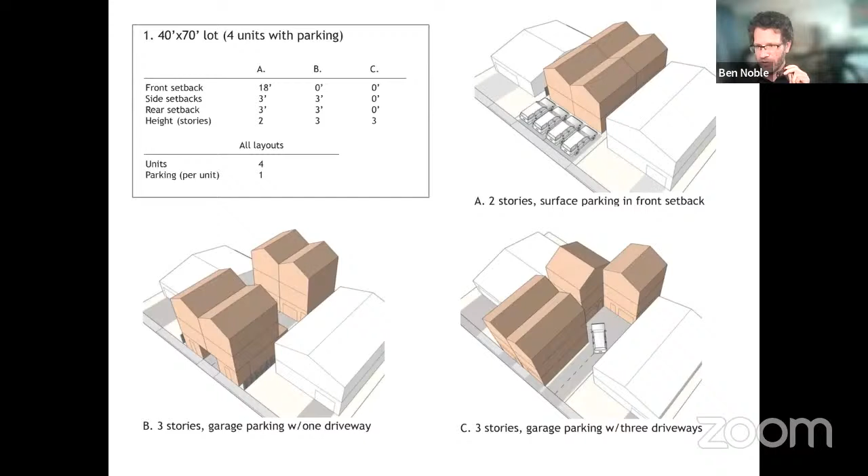Okay, we started by looking at the smallest lots first, the 2,800 square foot lots. As Ben said, our starting criteria was 2-story buildings, 800 square feet, and preferably a decent setback in the front—15 feet was what we assumed would be good to start with.

In the upper right here, you can see a pretty constrained and fully covered site with 4 units at 800 square feet. Basically what it shows is that on the smaller lots, it's really hard to get to the interior of the property, because it's so small. You'll see we have surface parking shown in the front setback area, mainly because it's the only place we could fit it on the property at 2 stories.

You've got, as you can see, double aspect or 2-sided units that really only have windows on 2 sides, and the setbacks are really minimal. So it's very constrained. As we looked at many of the smaller sites and options for them, it became obvious that sticking with 2 stories was going to be really challenging.

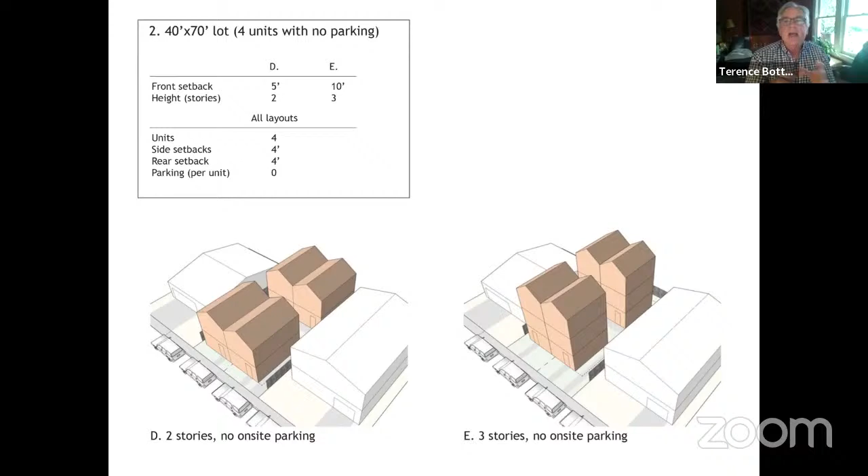Next slide. As Ben said, we also looked at some options without on-site parking, just to check the effect. On the left, 2-story; on the right, 3-story structures. You can see there's quite a lot of improvement in terms of the aspects of the building as well as the on-site open space. One of the things these images show is the difference in going from 2 to 3 stories—you can easily see the increase in on-site open space, or garden space, landscape space, as the footprint shrinks when you go to 3 stories.

I'm going to go kind of quickly because, as you can imagine, there's quite a bit of detail and assumptions in each of these sketches. But first, it seemed like a good idea to do a quick overview.

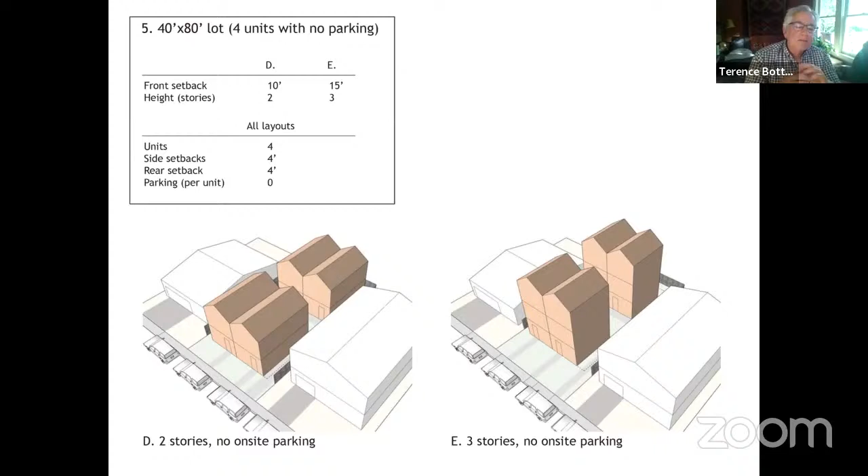Next slide. Again, looking at no on-site parking options, quite a bit of open space is freed up on the larger lot, particularly with the smaller footprints for 3-story buildings.

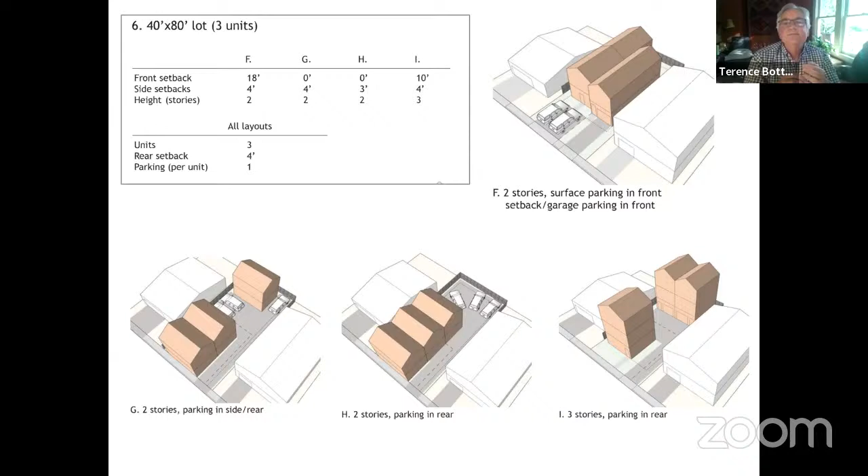And that is my overview. If you have questions, we're more than willing to dig in at some point.

Yeah, so I'll take it over from here, unless there are questions. I have a question. Susan? Yes, this is just to clarify.

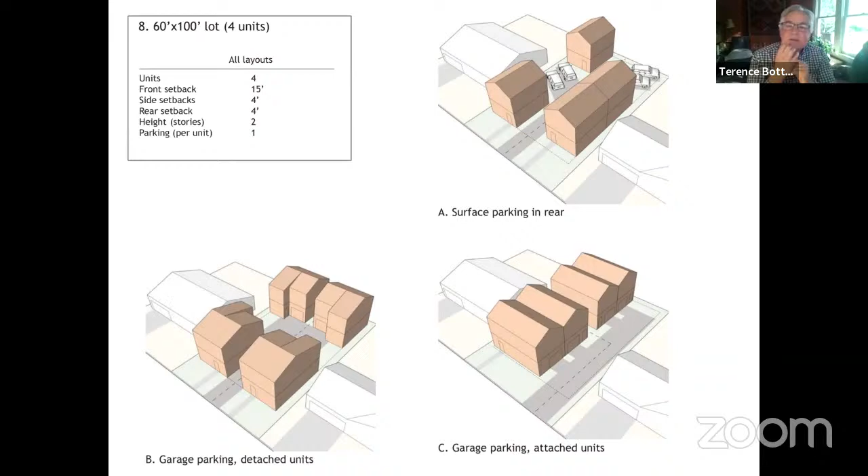So when we talk about a 2-story building, you used 22 feet in height. If we're talking about a 3-story building, what are we talking about as far as the height of those buildings? Sure, we assumed, just for the sake of doing the drawings, that the building heights would be 30 feet to the eave line, and then another 5 feet to accommodate a pitched roof.

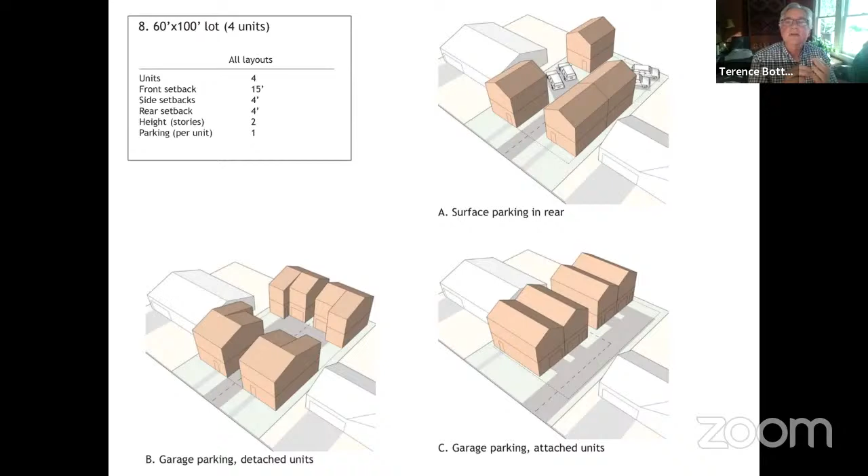As Ben and Katie and I have been talking about the height issue over the last week or so, there's flexibility in there because a lot of the height discussion depends on assumptions about the interior ceiling height in the units. So we didn't necessarily get too picky about that at this point. That's a more granular discussion that we know the Planning Commission is interested in. But for the modeling, we kept it simple and just assumed 22 feet to the eave line for 2 stories and 30 feet to the eave line for 3 stories. Okay, thank you.

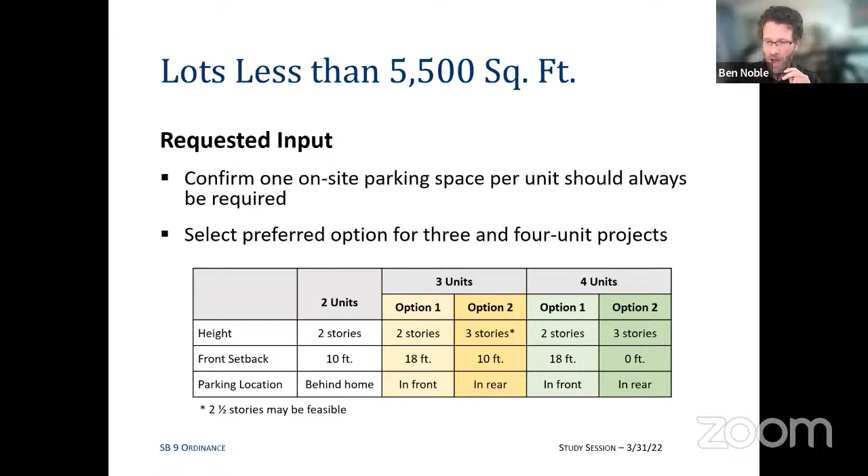Ben, if I could interrupt you for one second — sure. On that picture of that unit in Santa Cruz, they went through design criteria, and Arc and Site had to be approved by the city. And we don't have that option with SB9, right? That's correct, they have to be objective standards. So whatever somebody submits, we have to approve.

So we'll never get anything that looks like that — right, there would be no discretionary design review process, but the city does have the ability to establish objective design standards that could apply to a project like this.

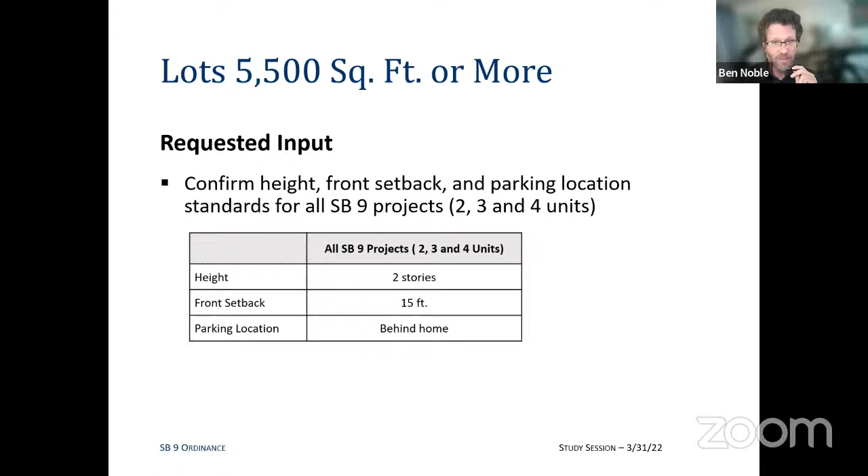Okay, and then, as we were saying before, for lots 5,500 square feet or more, we think the city can get most of what it wants even on a 4-unit project, limiting it to 2 stories, a front setback of 15 feet, and parking located behind the street-facing building.

And so in terms of building height, our recommendation is if it's a 1-story building, 16 feet, similar to what the ADU ordinance is. For a 2-story building, we would recommend establishing a maximum height of 20 feet to the eave with 5 additional feet for a sloped roof as a way to encourage pitched roofs and not force flat roofs.

Question: with regards to the 2 and even the 3-story, did you do a daylight plane study to see how a 3-story or a 2.5-story would affect neighbors? No, we didn't. Okay, because I would. All right, thank you.

I have a question. What is the motivation for the steeply sloped roof? Oh, just from a neighborhood compatibility perspective, that having a pitched roof rather than a flat roof would be more harmonious with the existing neighborhood character. But that's a pretty steep pitch, which makes more sense in areas where you have snow.

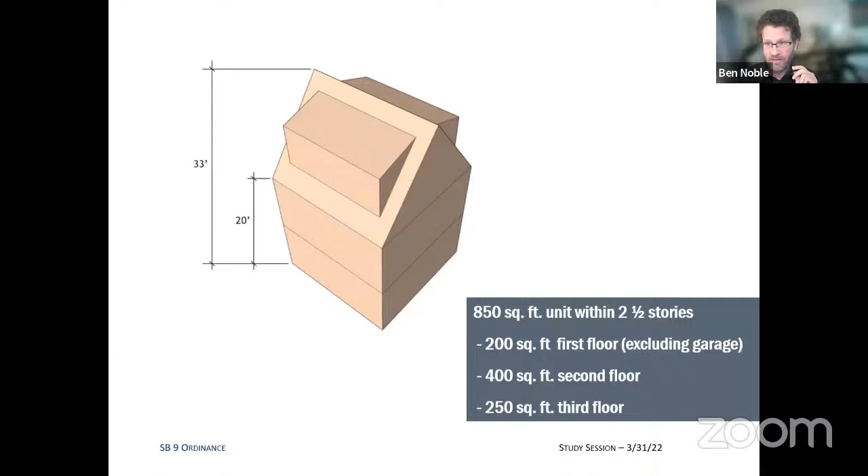Are you talking about this? Well, you're allowing 5 feet for the roof slope. Yeah, I guess, and I would have Terry weigh in on this, whether 5 feet is the right additional amount or if it could be less than that. 5 feet is kind of medium, I think we were looking at a 5-to-12 slope max.

Ben, I think you had an image, if you back up a sec, that's not particularly steep. One more maybe. It's going forward. Maybe it was forward. Oh, it's forward, okay. We're thinking something more like this, right? This is probably a little less than 5 feet from the eave line to the peak, but it's not super steep. 5 feet generally isn't going to result in a very steep roof.

So this is somebody's opinion of what is aesthetically most desirable in Capitola? Well, I think our assumption was that it just fits in. I mean, most of the neighboring houses have pitched roofs rather than flat roofs, so it seemed like it would be good to accommodate that.

Yeah, I mean, I think that if accommodating sloped roofs is not a priority for the planning commission, that maintaining a maximum height of 22 feet without any sort of additional height to accommodate a pitched roof is certainly available as an option.

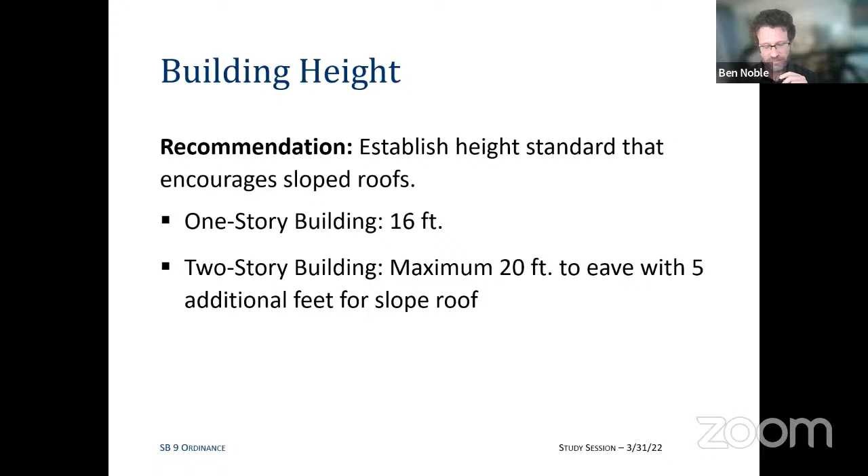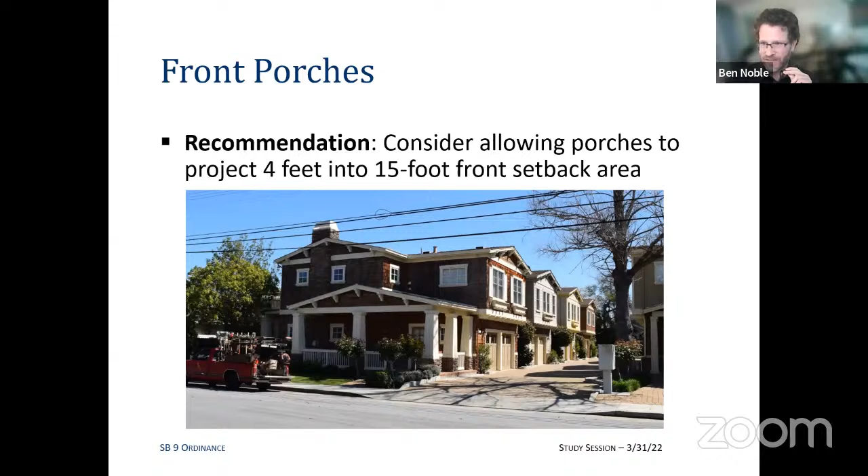And then the last thing with the front porch, here's an example of a multi-unit building in a primarily single-family neighborhood that, in my opinion, does a relatively good job of fitting in to the existing character. One of the reasons for that is that it has a front porch that projects into the front setback. So I think it wouldn't improve the neighborhood compatibility of the project to prohibit that front porch. If that porch was absent from this project, it would reduce its compatibility with adjacent development.

Okay, so that sort of concludes our presentation, and I think that our mindset with all of this is to help Capitola figure out the best way to comply with the requirements of SB9 in a way that produces development that is most compatible with the existing neighborhood character. That's really what our thinking has been with all of this work that we've been doing.

In terms of the requested Planning Commission input tonight, for lots less than 5,500 square feet, confirming that the desire is to continue to require 1 parking space per unit for 2, 3, and 4 unit projects, and to provide feedback on which of the options for the 3 to 4 unit projects is preferable. We would then use that to craft our standards that would come back to you in a revised ordinance.

And then for the lots that are 5,500 square feet or more, for you to confirm that the height, front setback, and parking location standards that we've shown are consistent with what you'd like to see. And then finally, on these last 2 items, feedback on measurement of building height for 2-story projects, and also the issue of allowing front porches within the front setback area.

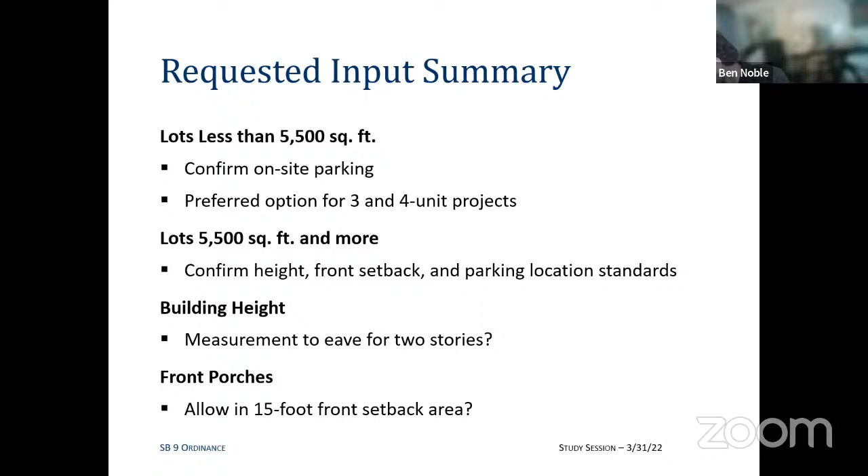Well, I'll go first if no one else is interested. For me, for lots less than 5,500 square feet, I think it's important to continue to have on-site parking because those are the neighborhoods that currently have the worst parking situations. If you look at the Riverview Terrace neighborhood, the streets are fully parked every night now without any additional units going in. So for me, I would like to see on-site parking stay.

I understand that that means we're probably going to have to go to 3 stories on those sites. And I would like to see the 3 stories be as low as it possibly can without having too much impact. That would probably mean putting a 3rd story in a pitched roof, similar to the example that you showed. So do you want me to stop there, or do you want me to go through the whole list and then give someone else a time?

Well, why don't you go through the whole list? Okay. For the lots of 5,500 square feet or more, I like the idea again of on-site parking, and sounds like 2 stories are going to work in those situations.

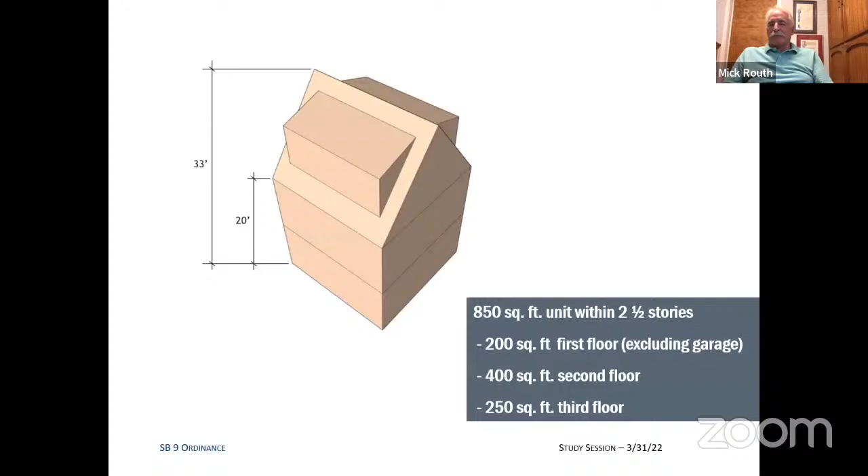With that, Commissioner Routh, I just want to clarify from what I heard. I heard you say keep the on-site parking requirement. I would prefer that over 3 stories. But you're saying the parking, don't take it off the property altogether, require it in the front yard? I would rather see it in the front yard than a 3-story building on a 40 by 80 or 70 by 80 or 70 by 40 lot.

Okay, so what we see in option A here. Yeah. Okay, and then let's just go through the other questions, so we get all your feedback.

So for the 5,500 square foot lots, you're okay with it as long as it stays to two stories, parking in the back as we were directed at the last meeting. Building height, do you want to comment on that? I would agree with Susan. I think sloped roofs are important, and we should try to limit the height to as low as possible.

Okay, thank you. And then within the front yard setback, would you allow for a minimum front porch? Our current R1 standard is to allow a porch to extend 4 feet into the front yard setback, so that's what we were thinking, just being consistent with R1. Well, if we allow that, then we force the parking into the street and go higher. You're right, that wouldn't be allowed in your scenario with the parking in front. I think it would only be possible with a 2-unit project.

Can I ask a question, since both Susan and Mick made a point about sloped roofs? I just keep thinking of 19th Avenue in San Francisco and all those row houses with the Italianate tops, quote unquote flat roofs, but decorative and interesting, part of the San Francisco look. So is everybody thinking of flat roofs in terms of not wanting to look at a box, or is it a daylight plane issue, or is it just that pitched roofs are lovelier? I think it's an issue of compatibility with the neighborhood.

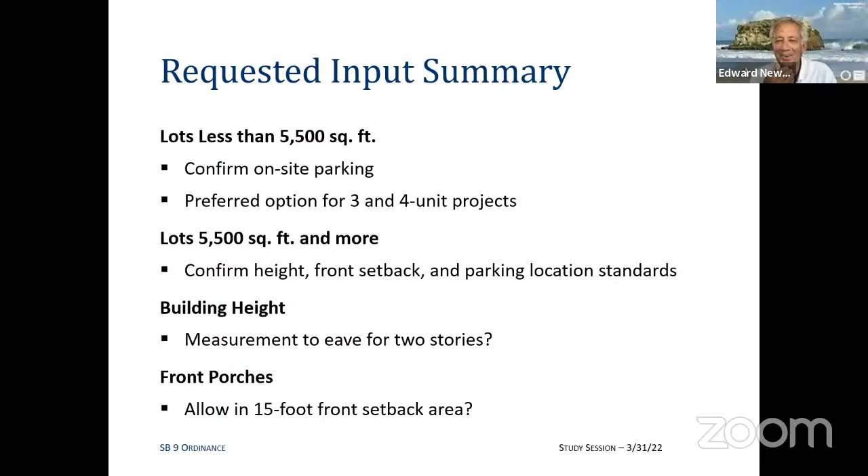I think cities cannot establish standards that make the housing infeasible, and there have been a few cities that have attempted that and received letters.

Well, let me address a different issue. Staff level - so we couldn't do a waiver since it's a staff level approval. So our chance to make any decisions is right now.

Okay Katie, I'd like to address a different issue. Let's assume I'm splitting my 6,000 square foot lot, and I'm putting the SB9 units on one half, but I want to build a single family home on the other half. Is that single family home subject to the R1 setback requirements?

It would be reviewed as an SB9 project, and it would be subject to these new development standards. The only exception is if there were an existing home on the site greater than 800 square feet - that home is allowed to stay, and you can do your subdivision for the other 2 new units on the separate lot, knowing that lot has to be at least 40% of the existing total square footage of the lot.

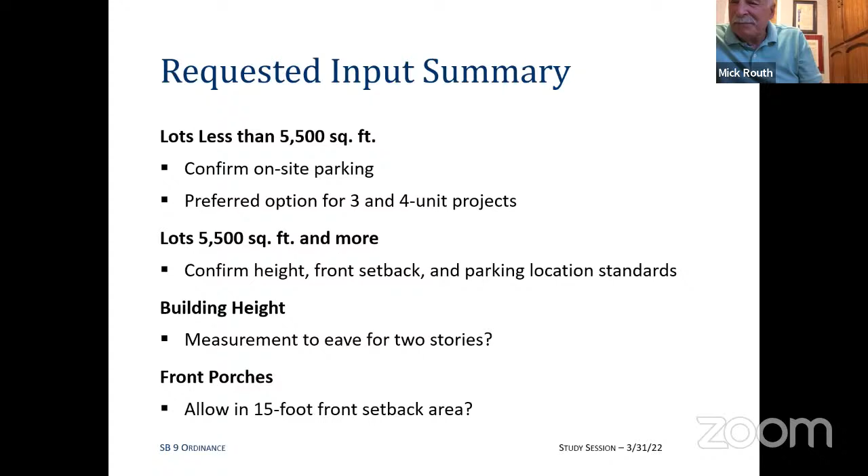It's a great question, and I don't have our attorney on the call. Recent guidance did come out from the state suggesting that you may have that right, because within the SB9 guidance it says up to 2 units per lot, but I would want to bring that back to our city attorney for further review before giving you a firm answer on that.

Okay, thank you. Other cities are interpreting it that way. So, okay Courtney, do you have any comments on the presentation?

Yeah. Can you hear me okay? Can you hear me okay?

Yes, okay thank you. I just was wondering with the curb cut - I know there was talk of parking in front of the unit. I think it was option A in that last slide that we just reviewed. Having a curb cut of that length, is that a concern for anybody? Is that something the city really wants to have?

I know there's some background noise, I apologize. Ben, can you pull up that slide?

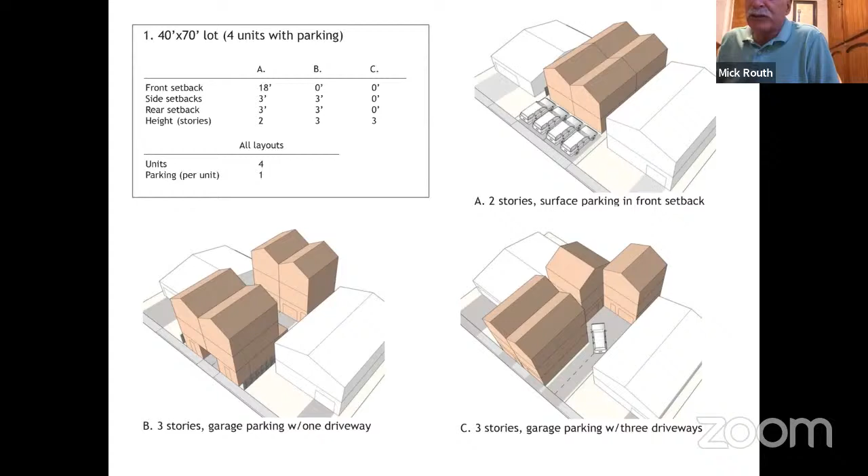Yeah, Courtney, most of the neighborhoods with the smaller lots don't have sidewalks. Oh, yeah, you're right, ours does. There's a good percentage— I'm just saying in terms of existing neighborhoods that do have sidewalks, it seems like that would be a lot of cars for the front setback of any given lot. That's just my initial input given this presentation.

Are you leaning towards 3 stories, or what would your preference be? I would be leaning towards 2 stories.

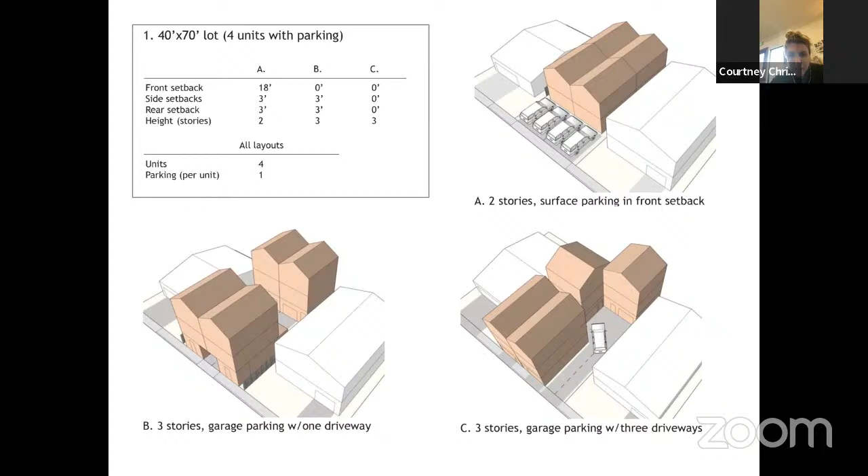I like—can you go to the other slide, maybe the other one? Is there a 3rd or 4th? That one. See where there's some type of configuration where you can enter into the complex of housing and be able to tuck your car in. I'd be in favor of 3 stories if there's an area to put your car, basically in the structure, if that makes sense.

And do you have a preference on the height, like a flat roof or a minimal pitched roof? I don't really have a preference of pitched roof or flat roof. I think it's kind of based on the design. I don't typically agree that it conforms or is more compatible for Capitola with the pitched roof. I think you can create a flat roof and make it just as compatible. But in terms of design, I don't have a preference, no.

I think that the allowance of the additional 5 feet for a pitched roof is appropriate. I just don't personally have a preference between the flat or the pitched.

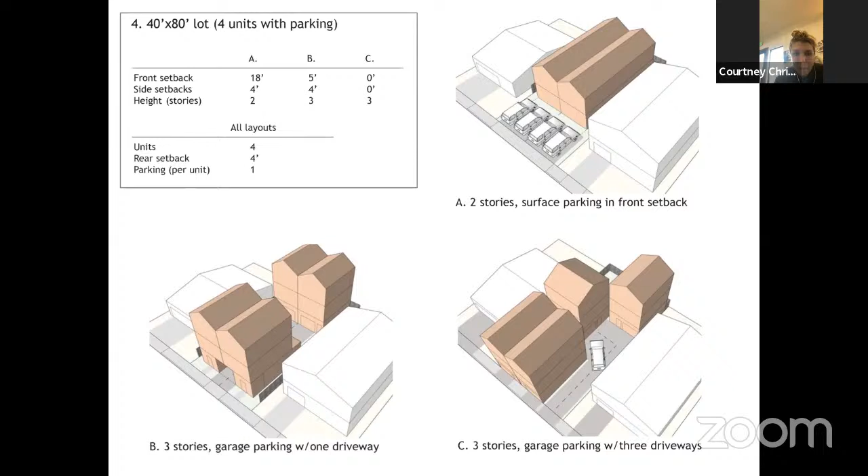And what about a front porch? I like the idea of the front porch in the front setback, encouraging that. Whether or not it encroaches the 4 feet or more than that, I haven't quite come to a conclusion, but I like the front porch within the front setback if it can be incorporated. Okay, thank you. Yes.

Okay, I've got a few comments as well, if everyone else has got their 2 cents in. My 2 cents has to do with the most important thing to me, which is an appropriate setback. We talk about 15 feet, but I guess what we really care about is that it's setback consistent with the rest of the neighborhood.

So you don't want to have a house that's jutting out, even if it's just a porch, beyond the line of houses down the street. So the notion of a setback is it's pedestrian friendly—you're walking down the street, you can see the landscaping, and it gives you a sense the community is consistent. So the setback may not necessarily have to be 15 feet, depending, like a Riverview, I don't know that there's any setbacks there, but it should be consistent with the neighborhood.

So I don't know how you do that—you'd have to do it neighborhood by neighborhood, but that's the general concern with regards to setbacks. I'm okay with the 3-story. The thing that bothers me about that is the daylight plane. So if a pitched roof would create the proper daylight plane so that at least there's some sun in the neighbor's yard, that would be the only reason I'd see for a pitched roof.

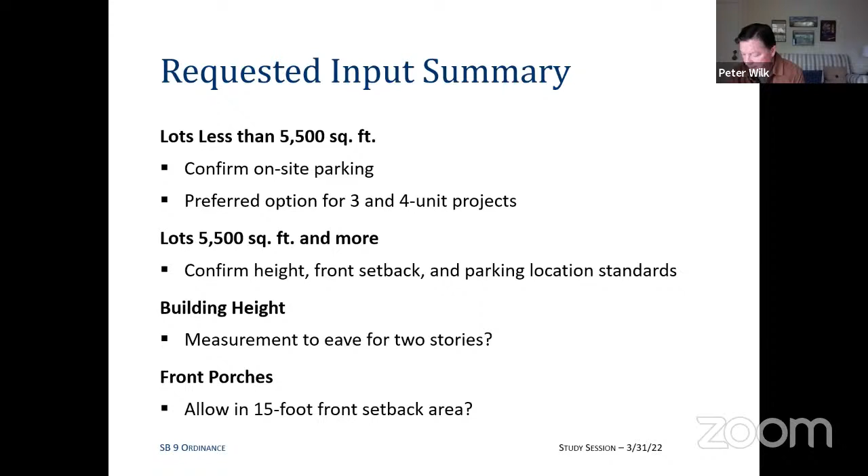With regards to parking, I would be okay with parking in the front setback because we know how to do that now with the Hollywood parking and the landscaping. So I'd be more concerned with the setback, but okay with cars there, reluctantly. I think that gives a lot of leeway with a decent setback. You're allowed to go to 3 stories and allowed to provide some parking in that setback, but no porches in that setback. Those are my comments.

As Katie mentioned, we are planning to bring a revised ordinance back to you on April 21st. And then if there's a second hearing needed, that would be on May 5th. Then the plan is to take it to the council either April 28th or May 12th, depending on whether there's one or two hearings with the Planning Commission.

So I would ask for a motion to continue at this point, if appropriate, to the April 21st hearing. You want to continue this item, not the entire meeting? This item, SB9 — we're going to jump into objective standards next for multifamily. Does anybody wish to make a motion to continue this until April 21st?

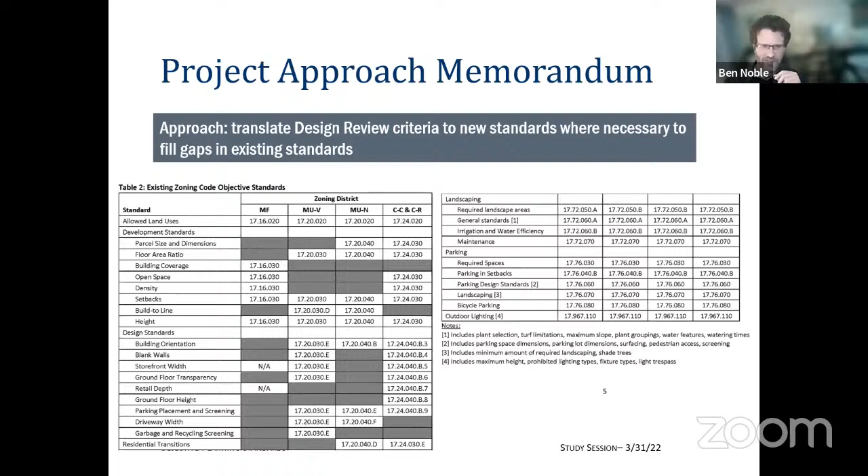An important part of the approach described in the previous memo to the Planning Commission is our plan to take the existing subjective design review criteria and translate them into new objective standards where necessary, in order to fill the gaps with the existing standards. So that has been what we've been working on.

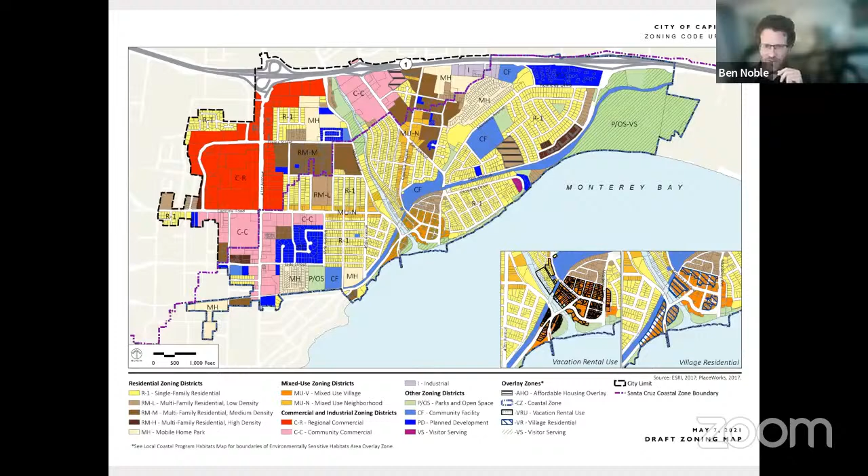Included in the Planning Commission packet for tonight's meeting is our current working draft of the standards. These standards would apply to all multifamily and mixed-use residential development in the RM, mixed-use neighborhood, community commercial, and regional commercial districts. They would not apply in the mixed-use village districts, and they would apply to all projects that require design review, as well as projects requesting ministerial approval under SB 35. These are not standards that are just SB 35 project standards—they would be generally applicable to all multifamily projects, including those required to come before the Planning Commission.

The way we set up this document is we've grouped the standards into categories that are thematically similar in terms of the contents of the standards within each category. Each category contains an intent statement that explains what the purpose of the standards is, what we're aiming to accomplish with them.

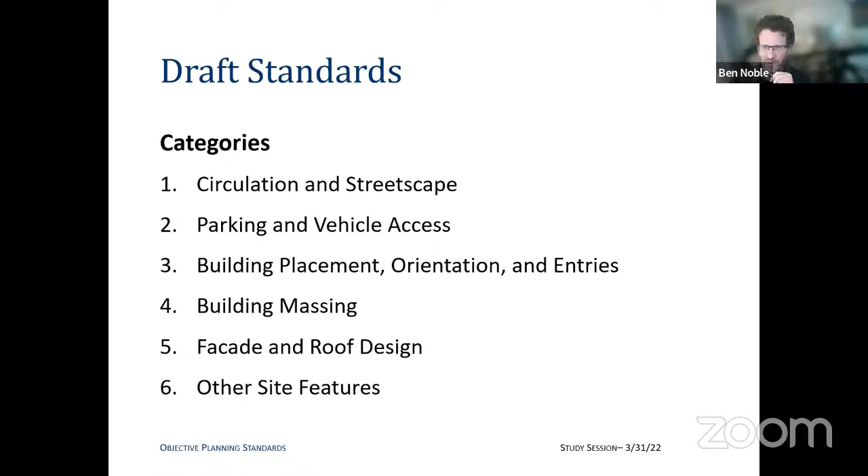The categories are circulation and streetscape, parking and vehicle access, building placement, orientation and entries, building massing, facade and roof design, and other site features. You can see how it starts with the development's site design and its relationship to the public realm, then drills down to finer grain detail—to building massing, and then to the details of the building facade and other features on the site.

An important aspect of this approach is to provide a pathway for an applicant to request deviations. One challenging thing about preparing new objective standards, which I think all cities doing this are experiencing, is that it's very difficult to develop standards that will work for every site, every project, in every context within the city. While we do our best to prepare standards we think will work for all different scenarios, we think it's important to provide a mechanism for a project to request a deviation from those standards.

The way we've set this up is that a proposed project may request a deviation from one or more standards. That's something the Planning Commission has to approve, and the Planning Commission would be able to approve that deviation upon finding that the project successfully incorporates an alternative method to achieve the intent of the standard.

A project requesting a deviation would not be eligible for streamline review under SB 35. So if a project wanted to deviate from a standard, that would kick them out of the SB 35 streamlined ministerial approval and back into the city's discretionary process, with planning commission approval required.

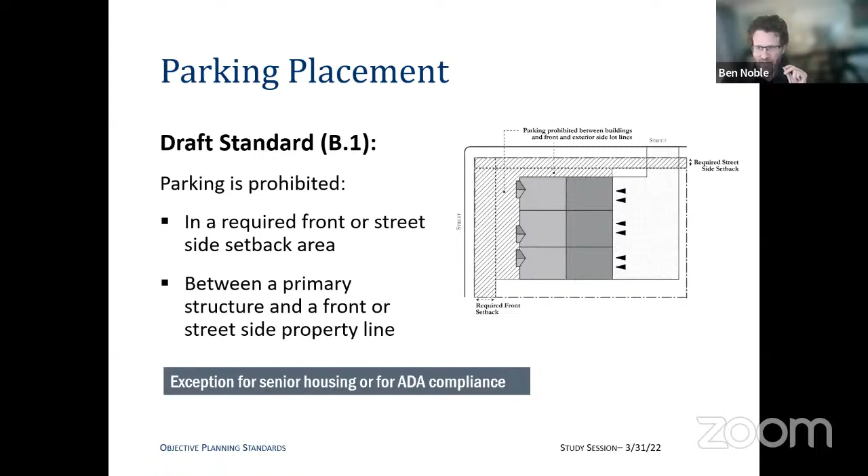So that's the draft standard. When we talked about this with the stakeholder group, we looked at a number of examples of existing multifamily development in Capitola related to parking placement, just to give a sense of the existing development pattern and how this issue relates to neighborhood compatibility and project design.

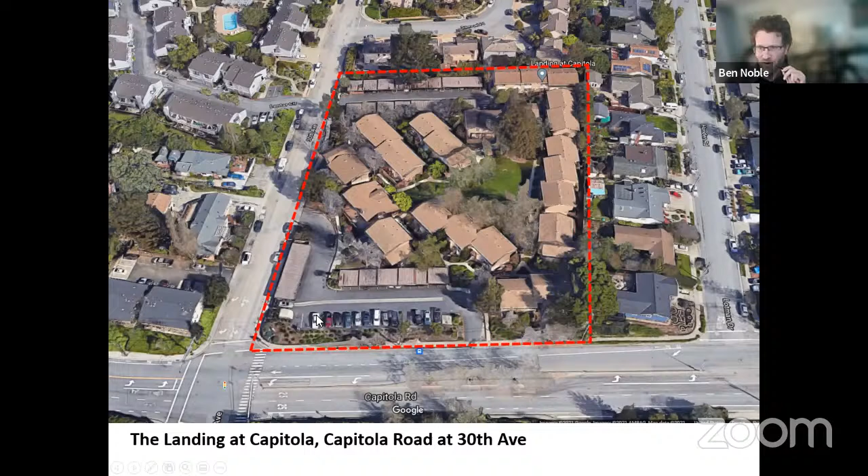Here's an example of a project on Capitola Road and 30th Avenue near the city boundaries, where you can see parking is located between the buildings and the street at the corner of the parcel. And here's what it looks like from the street. There's the parking, there's the building with a landscape strip between the two.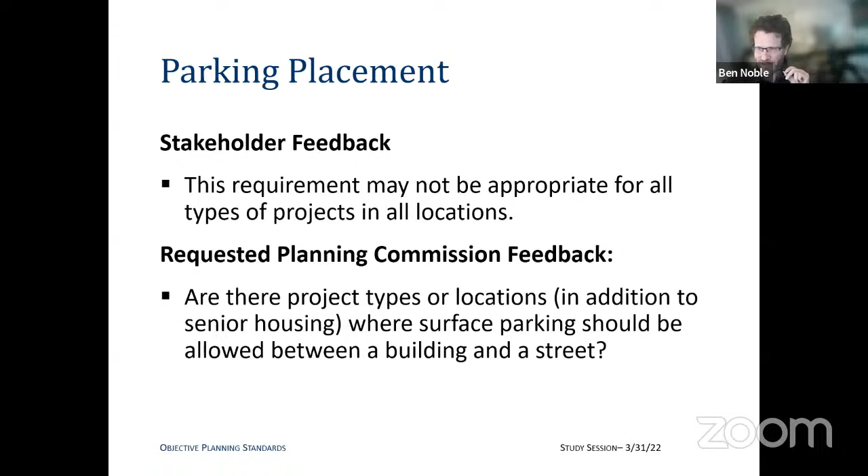When we talked about this with the stakeholder group, there was concern that prohibiting parking between the building and the street in the manner that the standard does would not be appropriate for all types of projects in all locations. In response, we added the exception for age-restricted senior housing as well as ADA compliance. But we're interested in the Planning Commission's reaction to this standard, what your thoughts are, and if there are project types or locations in addition to senior housing where you think surface parking should be allowed between a building and a street. So that's one question we're interested in.

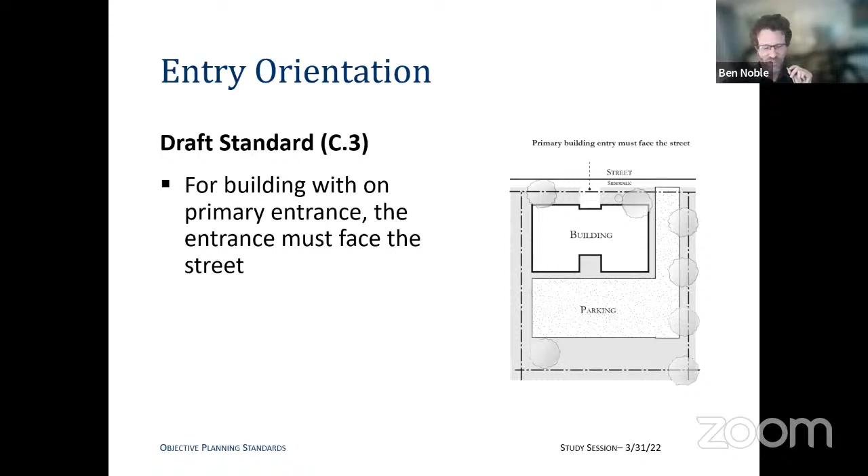Related to that is entry orientation. The parking placement and entry orientation in many cases are related to one another. The draft standard currently is that for a building with a single primary entrance, the entrance must face the street. For units with individual exterior entrances, if there's a ground floor unit adjacent to the street, the entrance must be oriented towards the street rather than the interior of the lot. If units are not immediately adjacent to the street and are on the ground floor, those entrances can face the interior of the lot, since they don't have street access.

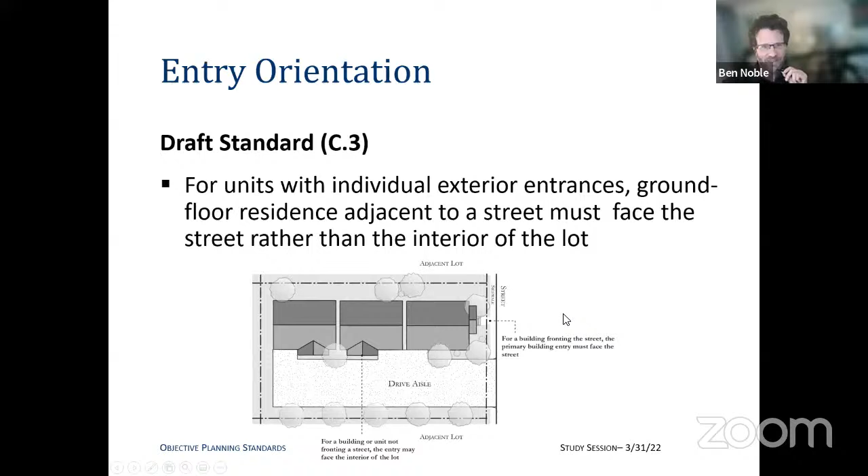In response to stakeholder feedback, we carved out a couple of exceptions to this requirement. We heard from the stakeholder group that there are roadway segments with high volume traffic, that are wide with multiple vehicle lanes, where having street-facing entrances to housing just is not appropriate. In response to that feedback, we identified a number of locations where street-facing entries for a residential-only project would not be required.

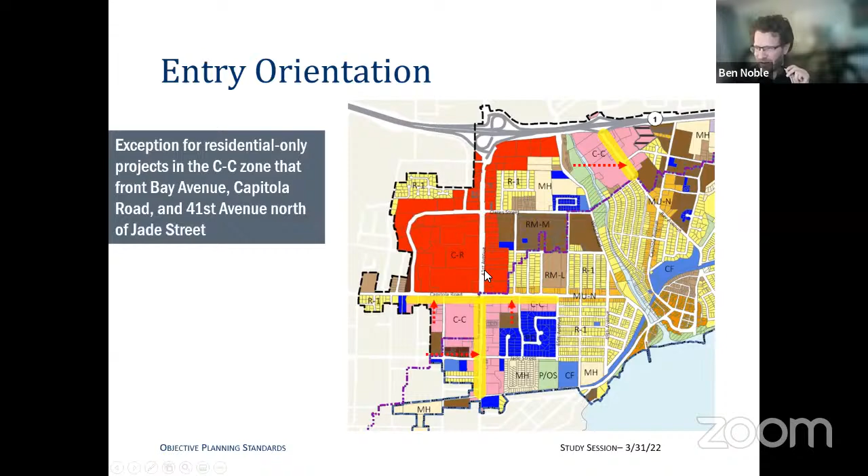That's shown on this map. The CC district fronting Capitola Road, 41st Avenue south of Capitola Road—it should actually be just to Jade Street, that's an error in the map—and Bay Avenue in the CC district. I'm not showing the 41st Avenue fronting CR district, because in the CR district you can't have a residential-only project. It must be a mixed-use project with both residential and commercial components, so the considerations are different for that type of project.

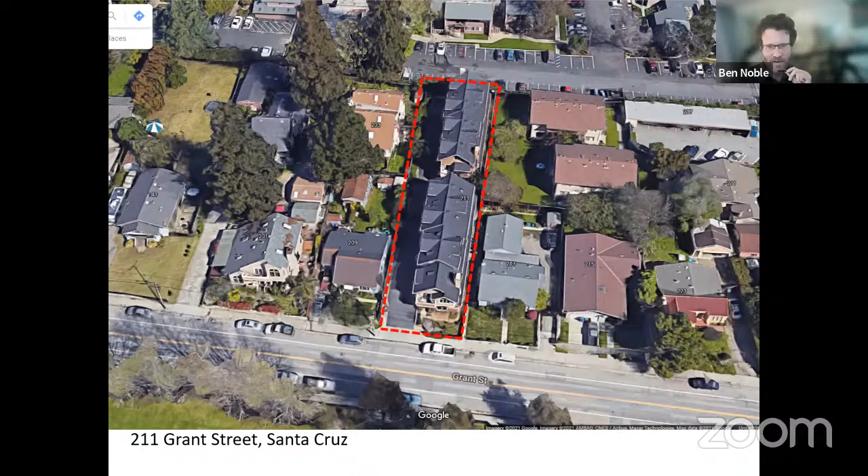Here's a similar narrow, deep parcel in Santa Cruz, not too different from the Clares Street example we just looked at, where the entrance to the end unit is oriented towards the street rather than the interior of the lot. This project would be consistent with the standard the way that we drafted it.